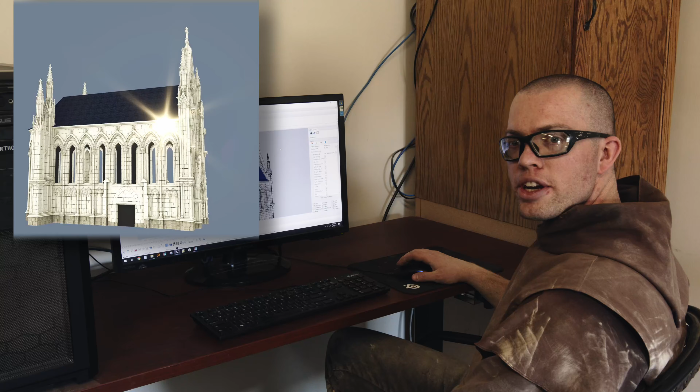So here we have a 3D model of our chapter house. What we do is we take the entire building and we model the individual stones in each placement. You can consider it as the shop drawings for the actual carving of the stone. It's all digitized, all 3D in a 3D model.

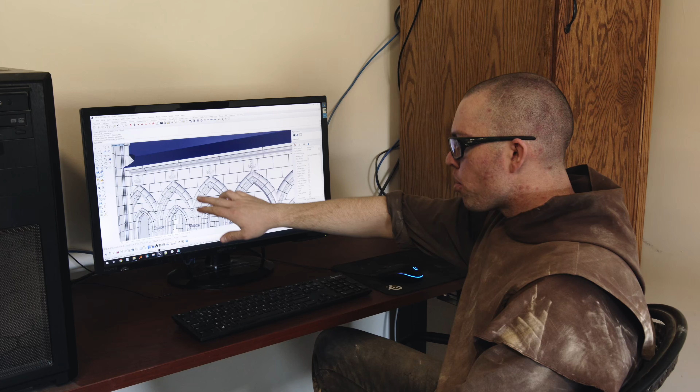It's one of the really handy things of modern technology, we can put everything together and know precisely how it will all work. So we take the entire building and cut it all up. You can see all the mortar joints, every single individual block and stone, the foliated pieces, all the foliations from the carvers, from the artist. Everything is integrated with our architectural plans, the structure that's there. Everything ties together here.

So then we can take any one of these stones. Every single one has a name, and every single one goes to a very particular spot in the building. For example, this is stone 538. Each one has its own particular name, and whenever we go to actually install the stone, they know exactly where that piece goes on the building.

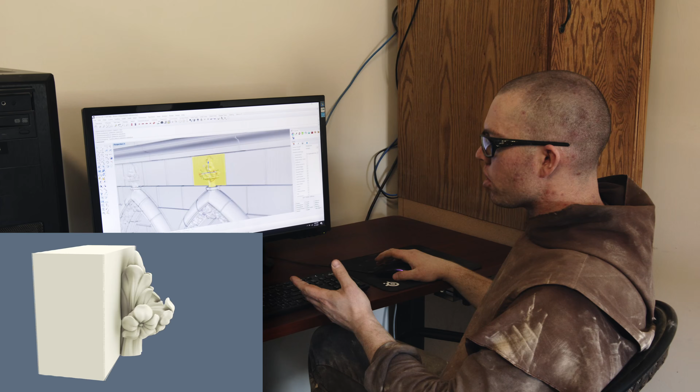So then what I can do is take one of these pieces that we'll carve into something, and export it out of this program. I can give that 3D model directly to the programmers, those who actually program the CNCs to carve each piece. Because it's already all set up that way, they can just take that model to precisely replicate it in the stone.

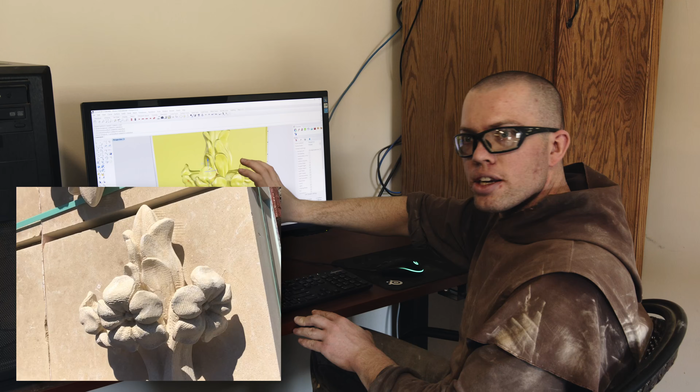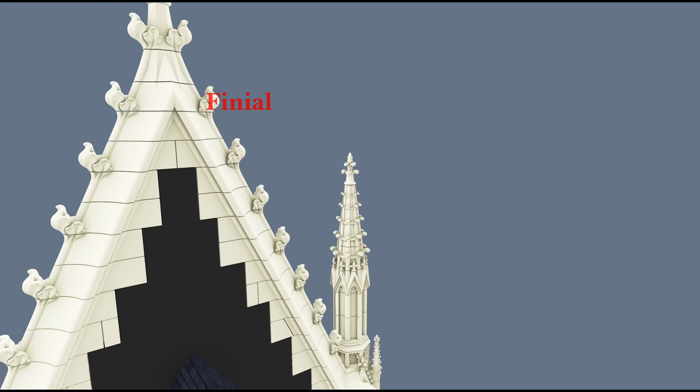So now here we are looking at the chapter house. Today we're going to carve the finial at the top of the pinnacle, this pillar, this pointy object on the front left side of the chapter house. We're going to go through the entire process from the design by the artist all the way through the programmer and to when we finally carve this piece.

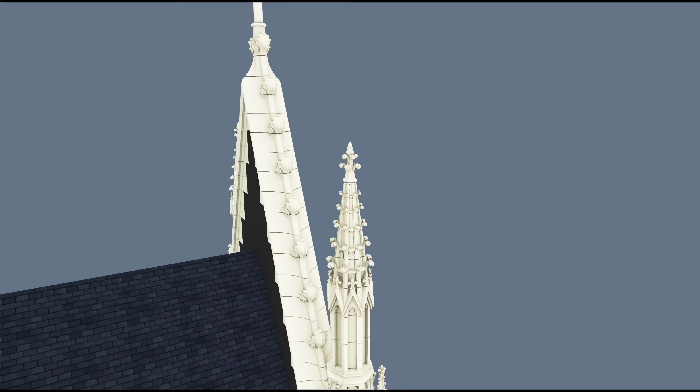Praise be Jesus Christ. I'm one of the lay brothers here at the monastery. I'm going to be going through with you how I design some of the ornamental foliated pieces that go on the architecture. What we have here is a pinnacle.

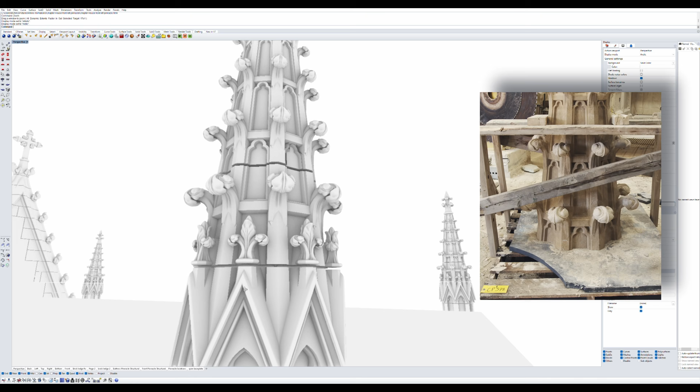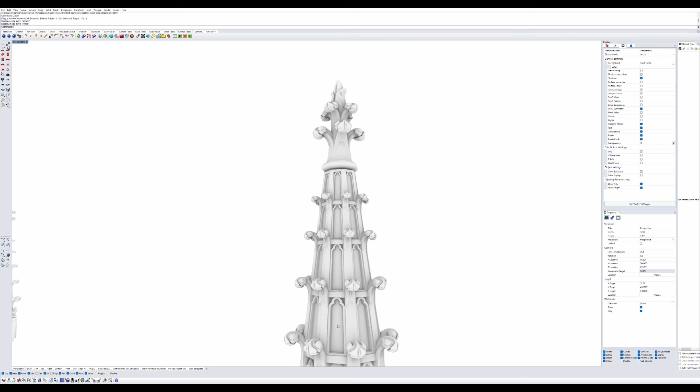At the bottom, I made a smaller finial, and we're going to show you how we went about creating the top, the very top of this pinnacle. There's crockets crawling all the way up to the very peak, to the piece where we're going to be working on. I'll just start with a ball.

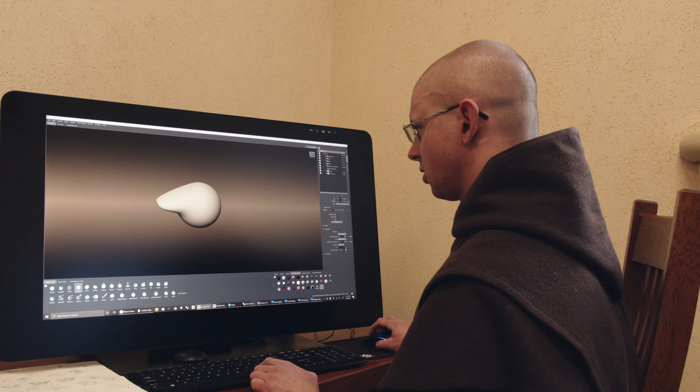It's like a piece of digital clay, and I'll just play around. I've got different tools. For a crocket, I'll usually use the grab tool, and I'll try to start the movement of a crocket, and kind of break it out, so it's like something that would protrude from the finial.

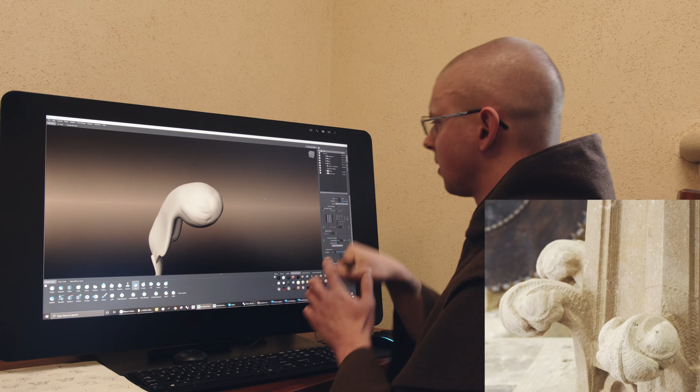I'll try to make a basic shape, what I'm shooting for is a budding leaf in spring, where it's coming up out of the ground or off the stem, just before the leaves pop out. Once I have leaves made, I'll use different tools to dig in there and get some definition, because everything needs to be a little bit dramatized in stone so that it'll catch light, because that's what looks good in the end with carving, having contrast between light and dark.

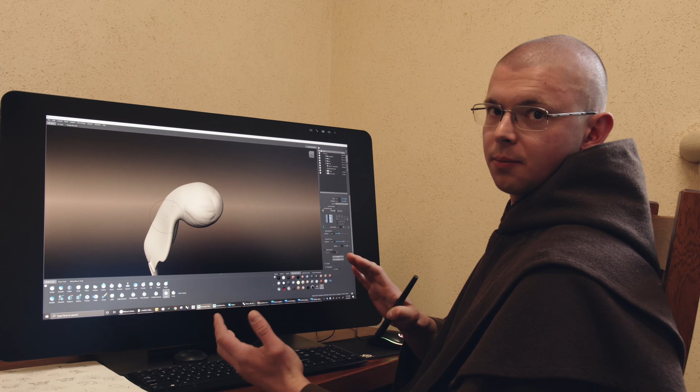There's a bit of undercutting happening between the leaves. I'll have a finished crocket, and it'll look something like this, and then I'll work on placing it onto the actual piece of architecture.

I'll start slapping them on there, and drag them around trying to get the movement like it's growing out of the piece. You can see it's like it's springing to life. It's trying to make the stone look like it's alive, like it has movement.

So I'll do a couple layers of crockets, and then at the end I'll put the very top, a bud where it looks like if you go out in spring you'll see these leaves popping up out of the ground, or these plants popping up, like they're formed together and then kind of peeling back. That's what I'm shooting for, so it gives the stone life.

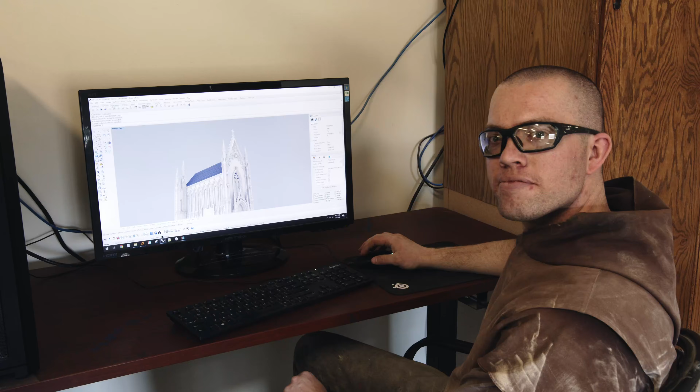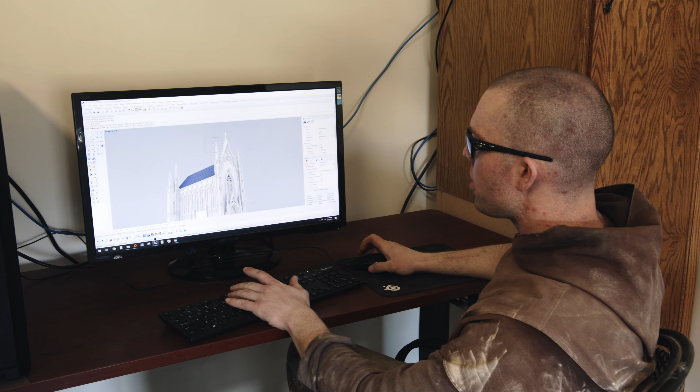Alright, so now we have the finial ready, piece 561 right here at the very top of this pinnacle. The artist has finished designing it, we've got it put in the model, and now if you look closely, this is the piece that we're ready to send off to the programmers. It's basically the very, very tip here, you can see that piece, and we're going to go ahead and get it programmed and get it carved.

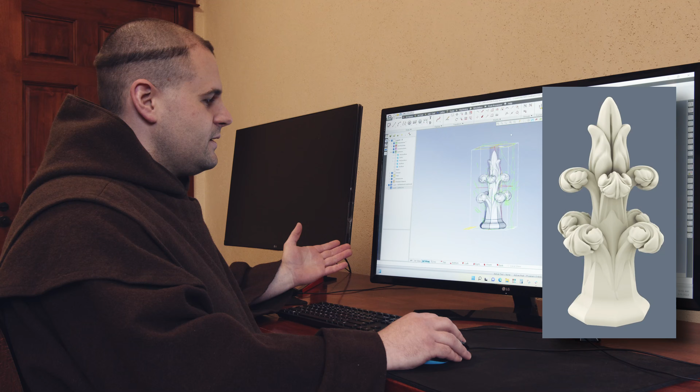Praise be Jesus Christ. Today we're going to be carving a finial for the chapter house. We have a 3D model here that was designed by one of our monks, and we bring it into this program called Pegasus. It's basically the program where you can carve by programming a CNC machine.

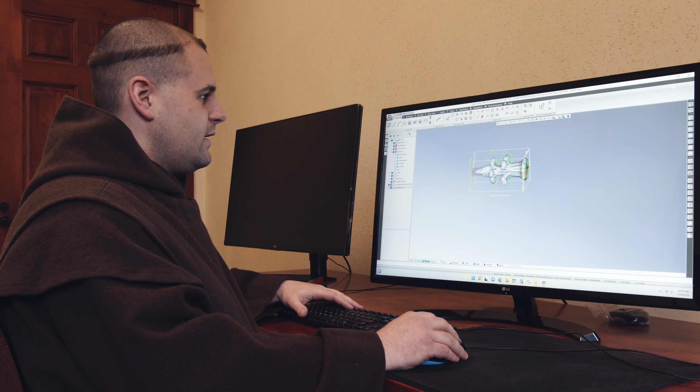So really this is going to be carved by a CNC, and we're just doing all the programming in this program. So basically it starts off as a stone block. You can see here these white lines show the outline of that initial block. Ultimately we need to remove all that material and get this final finished, polished finial.

Hey, so I'm one of the Sawyer monks that runs the bridge saw here. So we got a little slab here that we're about to use to cut a block out of, to use as a block for the finial to run on the CNCs. It's going to be the piece that goes on top of the pinnacles on the chapter house.

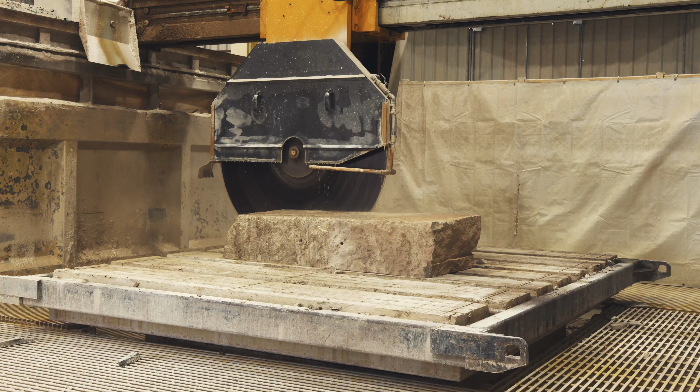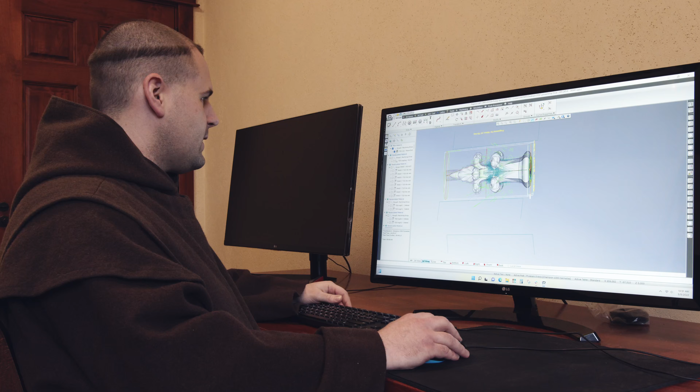So what I'm going to do now is just simulate here and kind of show you the process step by step. So here's the CNC. You can see it's got a structure and a spindle that moves around, and right now we have a big blade on it, so I'm just going to hide that. And you can see we've got a lathe back in the back here.

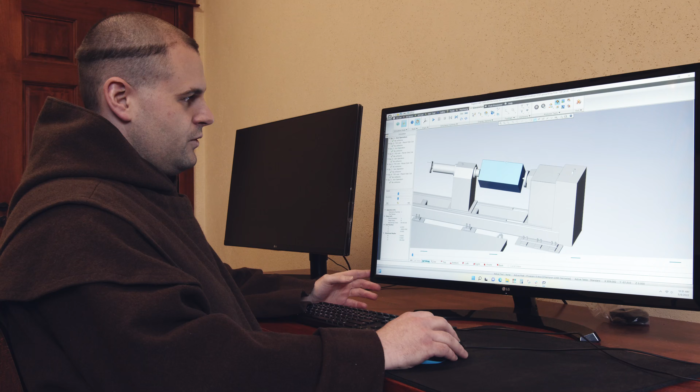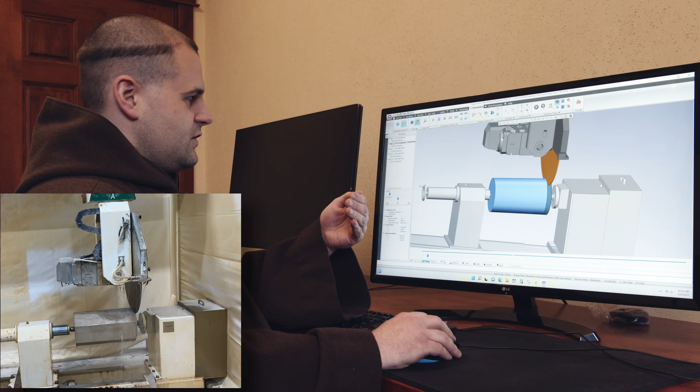So the stone, which the brothers have cut into this rectangular block, gets pinned in between these two points. The lathe will actually spin it so we can carve the different parts of the stone. We remove material by taking the blade, and the blade's going to be making cuts into that stone while the lathe is spinning, so it knows how deep to cut. What that leaves is all these ribs, and you can kind of see a shape appearing in between the ribs there.

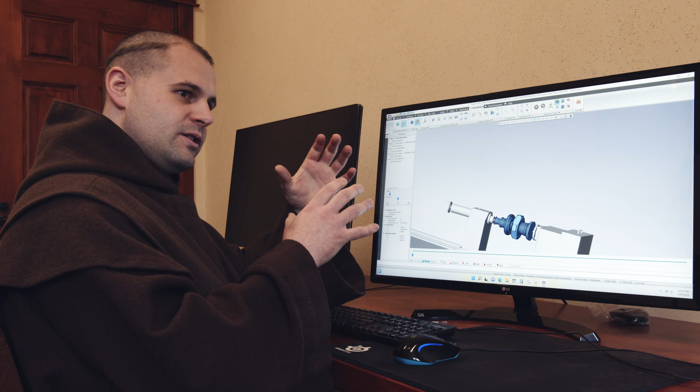So the brothers will go in with a hammer later, knock off the ribs, and that'll leave a roughed out finial, just the general shape. And we go from bigger tools to smaller tools, going bigger and rougher to finer, and we start removing the material and getting more and more detail.

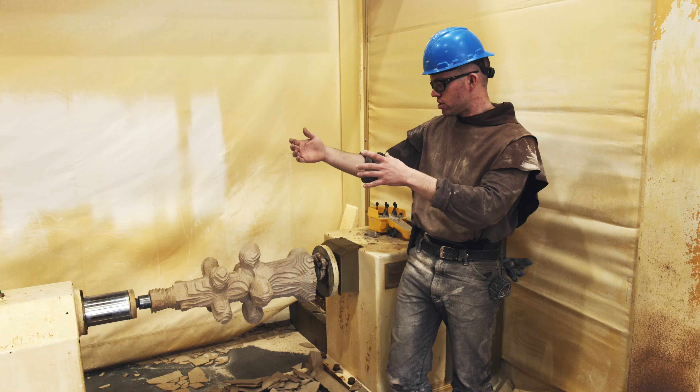So here you can see it already looks pretty good, but it's really rough because it's just the main material that's gone. This is a piece that we've been roughing out, and it's a finial for the top of one of the pinnacles on the chapter house. You can see the individual crockets forming out of it, and it's about halfway done. We've probably got another 15 hours left in this piece.

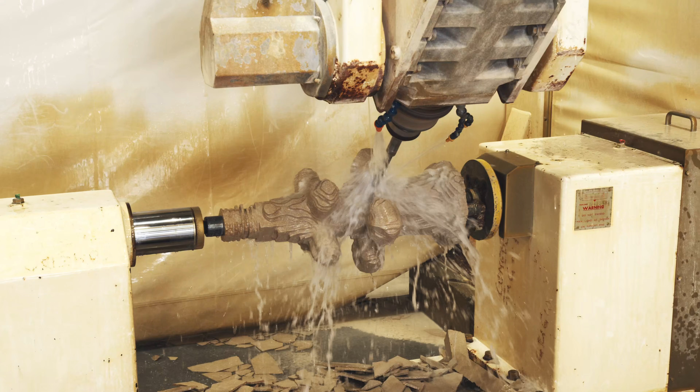The way the lathe works, you can see on this end, this is the drive end, so this is what actually turns the stone. This end will rotate, and it's interpolated with the rest of the machine, so it precisely positions the piece as it's carving and carves in that detail. It'll turn to wherever it needs to be, so it's a nice way to constantly be moving the piece and getting the perfect angle.

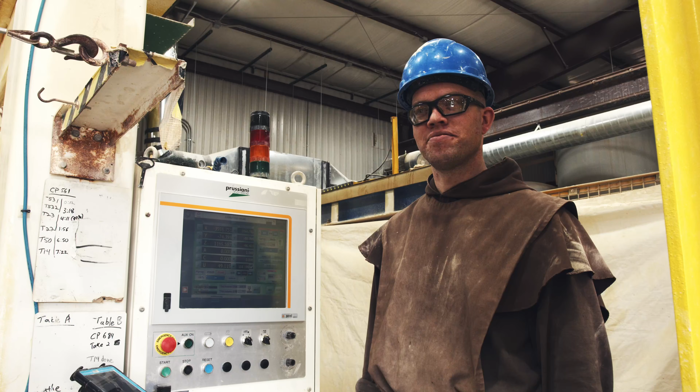So this here is the interface for the CNC machine. You can see the computer screen here with all these numbers. You have each axis, which is a range of motion. X would be left to right on the machine, Y would be front and back, Z would be up and down. Then you have A and C, which would be the rotating axes. It's a 5-axis machine, so the head will actually turn and point in different directions.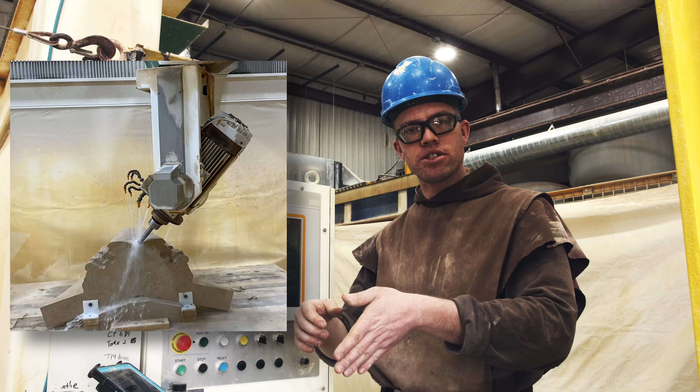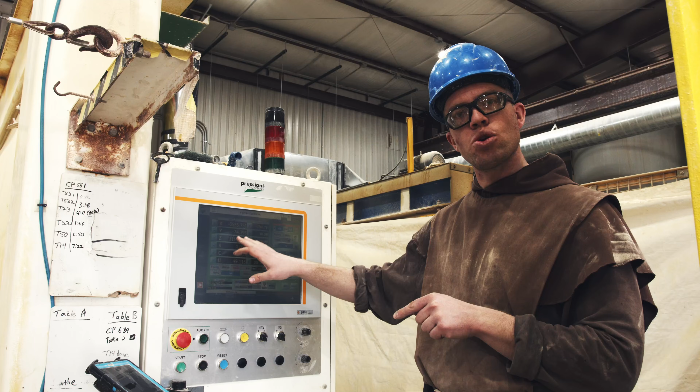And then we have the U-axis, which is the lathe. The lathe can actually turn and pivot and interpolate with the other axes, meaning they all work together to carve a piece, moving every single one at the same time in a controlled motion. So you have all of their coordinates, it's just a grid system. Imagine a huge Rubik's Cube, and all those coordinates, all those boxes, it can go to any single corner, any point in the entire machine. It's just like a massive 3D graph.

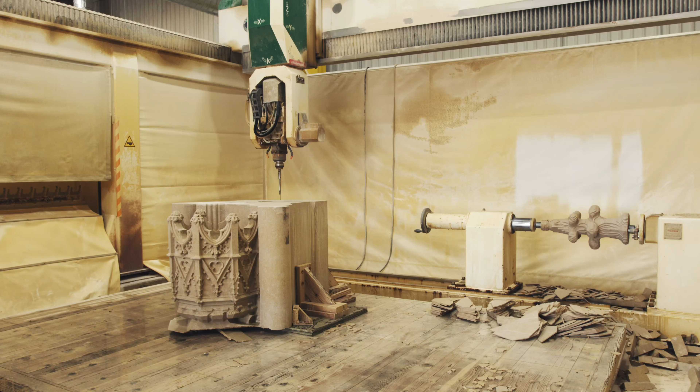All right, so now we're going to start up this machine and continue roughing out this piece. The machine first turns to the appropriate angle, and you can see the lathe positions. This tool's running at 6,000 RPM. Moving over to the starting point and going down to enter into the stone. And now it's carving away. This job will take about 2 hours.

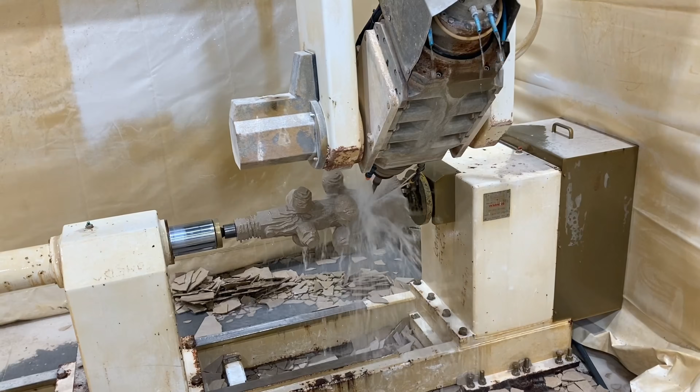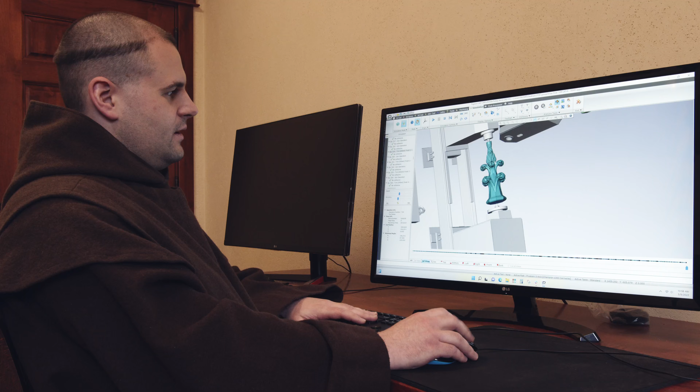So here we have the finished piece. You can see it's completely done, carved on all sides, and all the detail is put in. So this finial will actually end up being put on top of a pinnacle and will form the very peak of the chapter house.

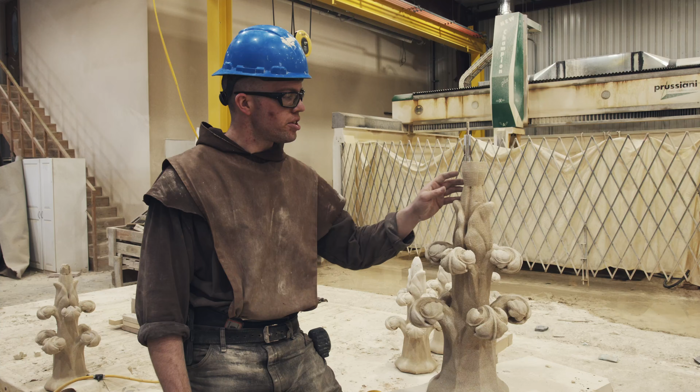You can see this piece here at the top we left on so that the lathe could pin it from both ends. We still have this piece here on the end. So now what we'll do is take this and carve it off, turn it into a nice point, and finish the piece for the top of the building. I'll just take this pneumatic chisel here and chisel off this end.

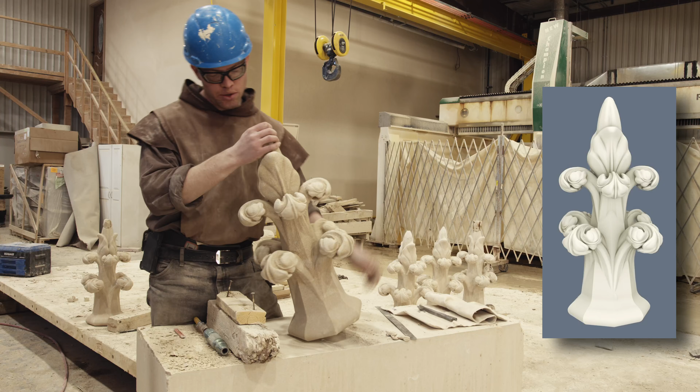Right, so this is basically how we'll hand finish our finials and other pieces where we need to do a little bit of touch up after it comes off the CNC machine. Just take a chisel to it and finish it up just like that.

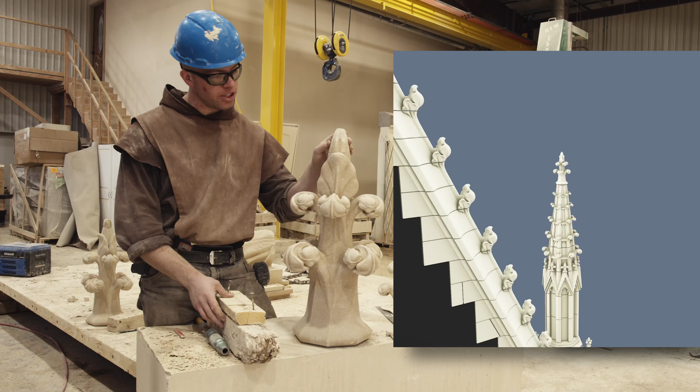So that's how we carve a finial.